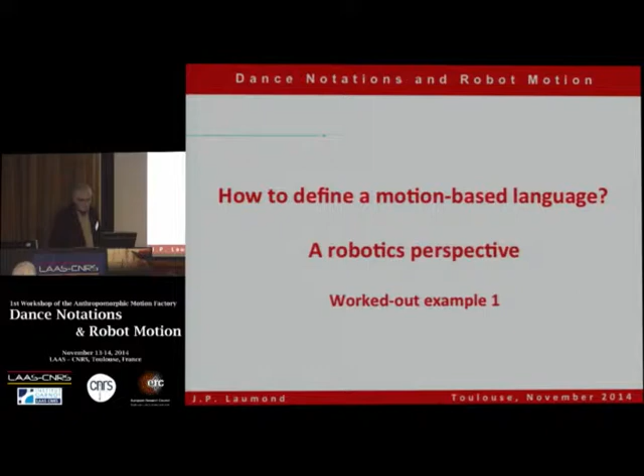And I would like to give you two examples from the robotics perspective on this question. The first example, you will certainly be surprised, is this one: how to park your car. Okay, then we are very, very far from dance.

How to park your car? Don't forget that you learned to drive a car. It's not an easy task. Now imagine that we have a robot, and we would like this car to park itself in an autonomous way. And you know that this is already done. Then what has been the key issue to solve that problem? The very first results were obtained at LAAS during the 90s.

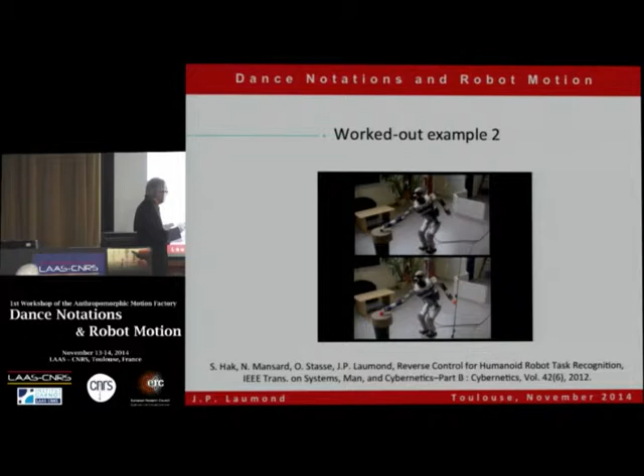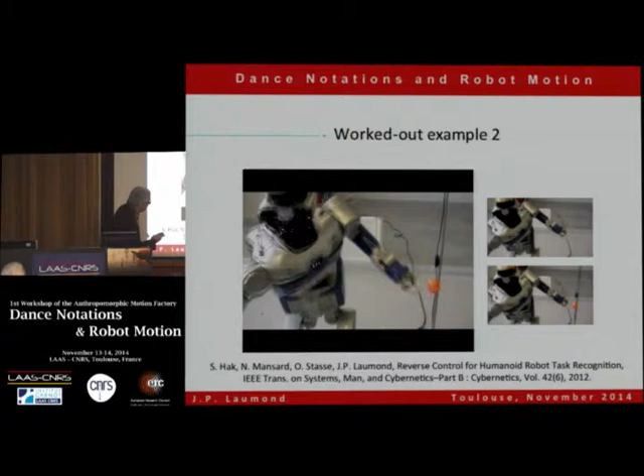And then the question is, are the motions the same? Apparently, yes. In fact, no. If we superpose here both motions in that picture, you can see some very slight difference on the left hand. Okay? There is a slight difference.

The meaning of the difference is that, of course, we have programmed the robot to grasp an object. What does it mean to grasp an object? To grasp an object means that my hand should be close to the glass. Okay, that means that the distance between my hand and the glass should be reduced, and should be reduced according to some law, and this is a law here which has been implemented.

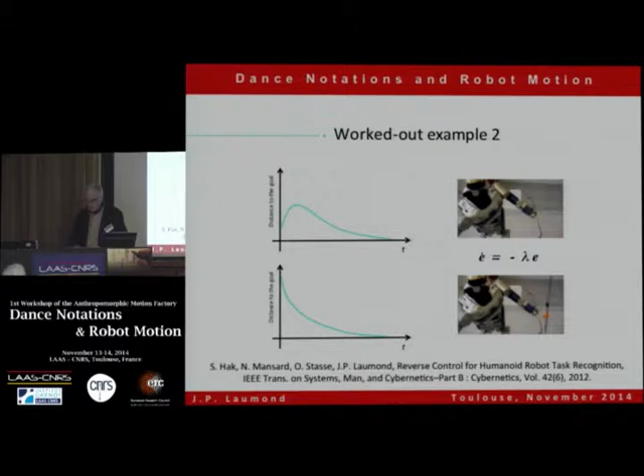But this law is not neutral. This law tells you the way the robot will reach. And if the robot follows this law, then necessarily the curve should be like this and not like this. That means that the slight difference has a deep meaning with respect to the action to be performed. That means that the way to go characterizes the action which is performed here.

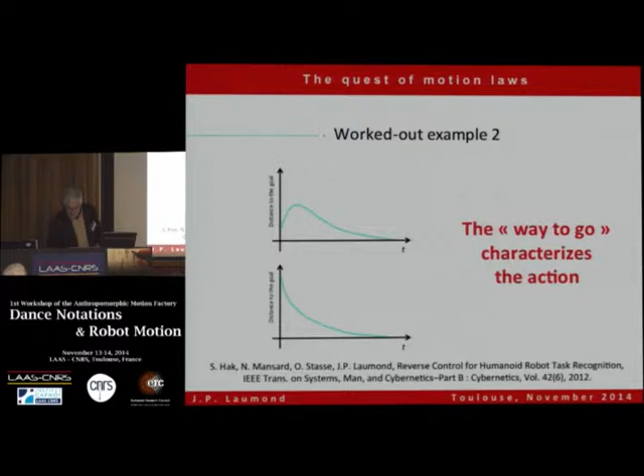Okay? And then if we gather all the examples, I want to write motion, okay, to make the scoring of the motion. And then motion notation is a matter of motion segmentation. What is the vocabulary? What are the words? Okay, and motion generation. How to translate the word into an effective motion.

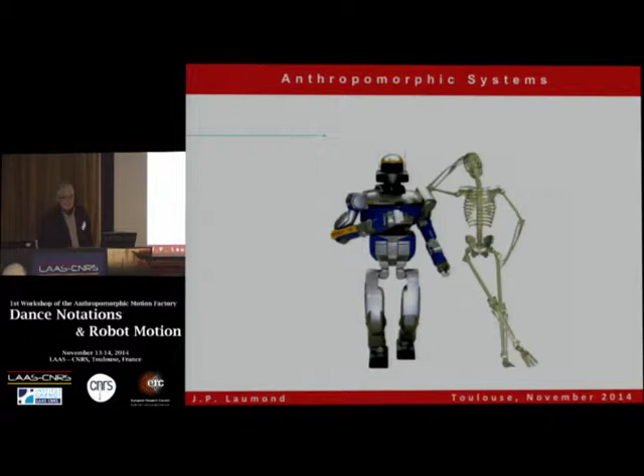Okay, then let us speak a little bit about the purpose of this meeting, because we are interested, of course, in humanoid robotics, and half of the assistants is interested by that, and half of the assistants is interested by that. Okay, that means the human body. And what is the ambition? The ambition is to account for both what I call the body space and the space of the body.

The body space is just the posture and how to describe a posture in the space, while what I call the space of the body is how to locate the body in the space. And this is very well known from the robotics people, because here there is, most of the time, some redundancy with respect to a task. There are many motions to grasp an object, while here there is an under-actuation. That means that to move the body in the space, you have to use the internal degrees of freedom which are here.

Okay, and then the key point, of course, for today is that human and humanoid robots share, not exactly, but share the same morphology at large. The same morphology, if we consider, for instance, the Laban's body model, which is quite simple, because this is exactly the same model we are using to model our robot here.

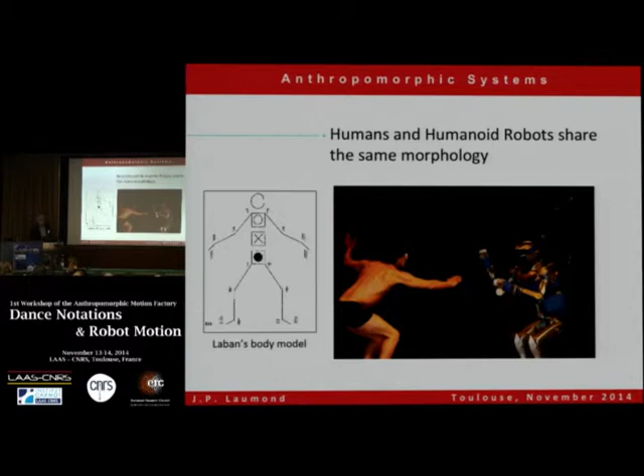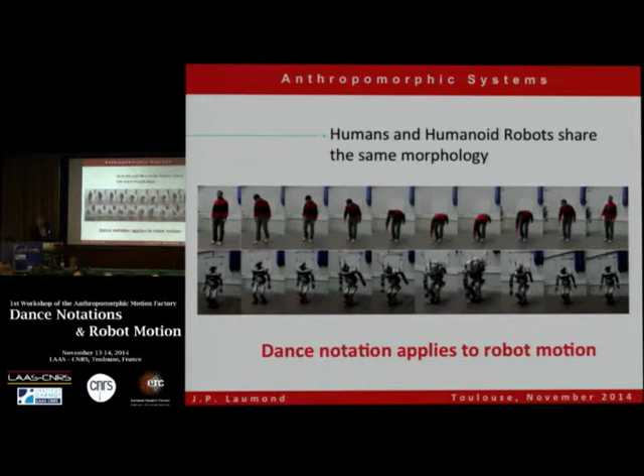Okay? And then, since there has been a lot of work about dance notation, it seems clear that if we want to describe that motion on a human here, we may apply dance notation. There is no reason, of course, that this notation does not apply for robot motion, to make the description of the robot motion. And this is what we did.

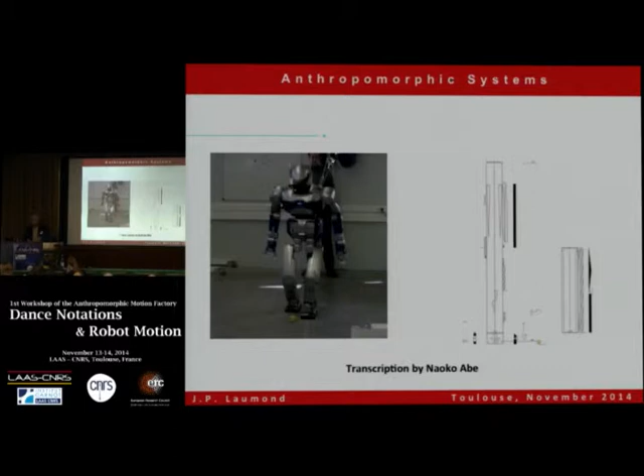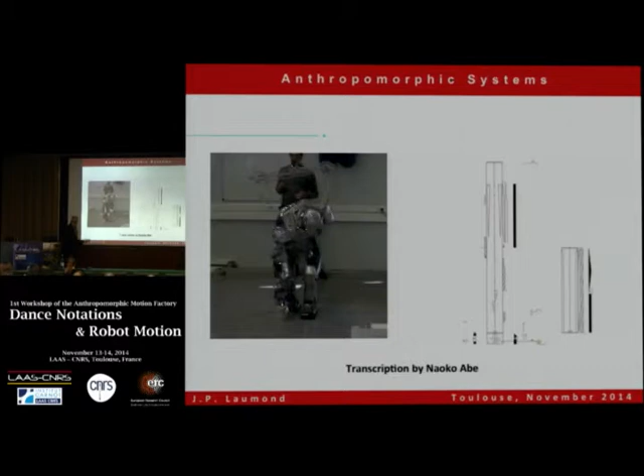And more precisely, this is what Naoko did, by notating this rather complicated motion here, which is to grasp the ball here. Okay, then for the specialist, here you may recognize that the ball is here. Naoko? No, it's here. Yeah. Okay, and then this is the scoring. Then, of course, Jacqueline Challet-Haas will introduce this notation here.

This is a scoring of the motion where the time is vertical. It's not exactly like in music where the time is horizontal. Here the time is vertical, and there are several symbols representing the body space.

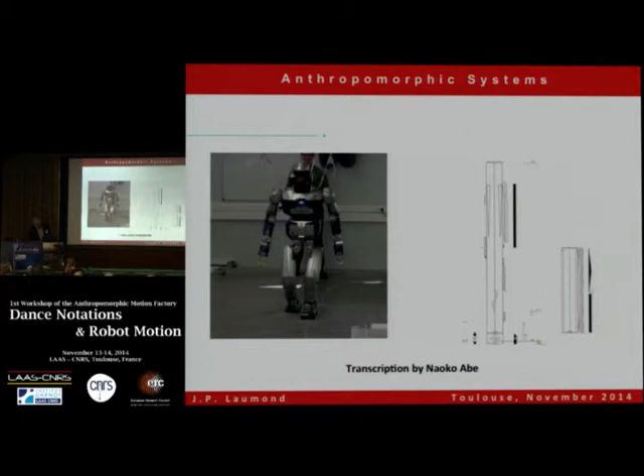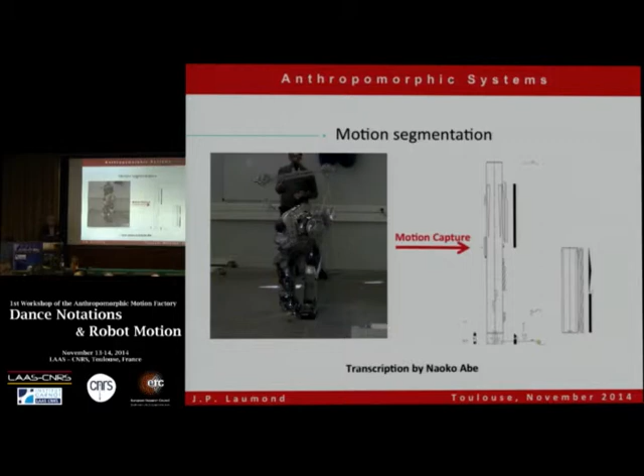Then the challenge now is how to use computer engineering techniques, perhaps, to make an automatic scoring of the motion, using technology, for instance based on motion capture. At that stage, Naoko did that by hand, so how do we make an automatization of that.

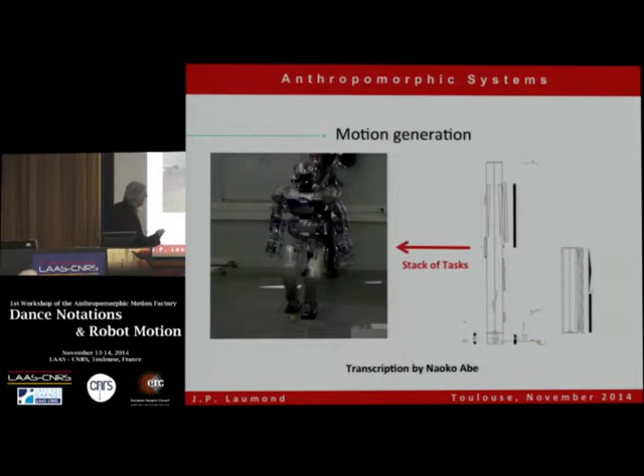And that I know that several of you in this room try to answer that question. This is motion segmentation. The second question is about motion generation, in the sense that if I give you that scoring, how do we provide that motion. These are the questions to be answered.

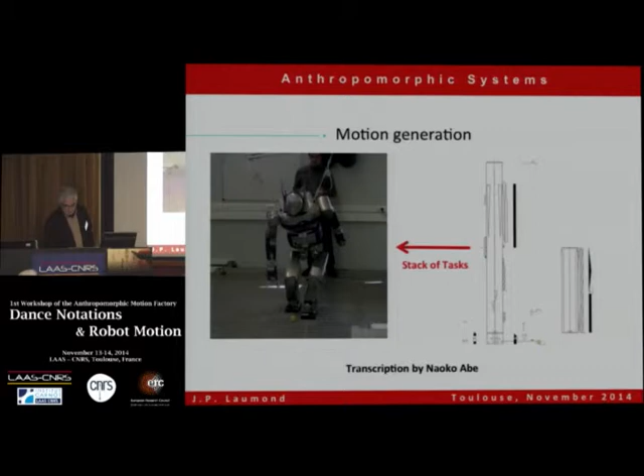If you are considering this scoring, which is completely obscure for the robotics part of this room, the computer science part of this room, but which is, I think, very clear for most of you, I would like to insist on a notion we started discussing with Noëlle Simonet during our last meeting, when I tried to say that for us, what is important in robotics is more than the body space, it's the action space.

That means that I want a robot to grasp a glass. I don't care about the exact motion, so I don't care, in fact, about the body space as such, as a description. At first glance, I thought that the Laban notation was only about the body space, but this is not true, as you explained to me. There are symbols here which are very simple that just designate the fixed point or the effect of the motion, which is what I call the action.

Then it's possible to make a summary. If you want, for me, grasp the object is just a symbol, and that's it. And it appears that it's possible to also use the Laban notations to make that. This is one of the topics we will certainly have to discuss.